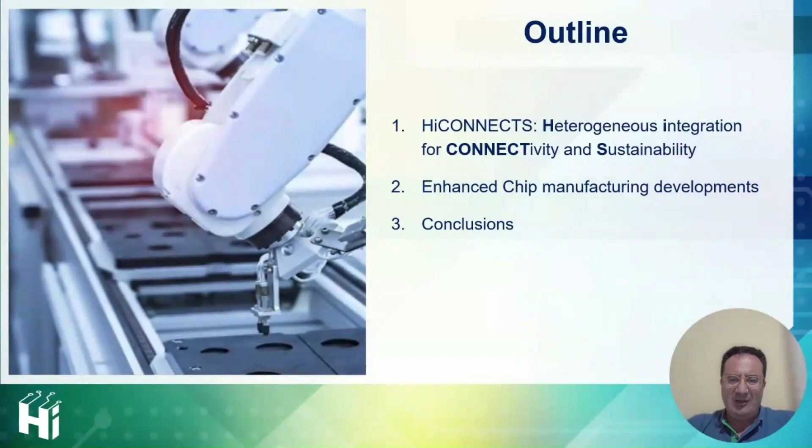Today, I have the pleasure to describe the improvement, the activity that we are developing in manufacturing in the framework of the project HiCONNECTS. And at the end of the presentation, some takeaways to remember what we discussed together. Regarding the project HiCONNECTS, consider that it is funded by Chips JU and is composed of 67 partners coming from 15 countries. The main objectives are developing heterogeneous integration for energy efficient and high performance wireless, wired, cloud and edge computing, as well as automotive radar, in order to improve transmission of Internet of Things data over IP networks, and sensing of objects to enable highly automated driving.

Consider that we also have other developments focused on RF technology, radar, IT data, infrastructure, but focus the attention on the heterogeneous integration objective. We talk about a system composed of different components, so it is easy to understand that the failure of only one component brings the failure of the system. For this reason, work on improving the quality in manufacturing has a result and an impact directly on the heterogeneous integration system.

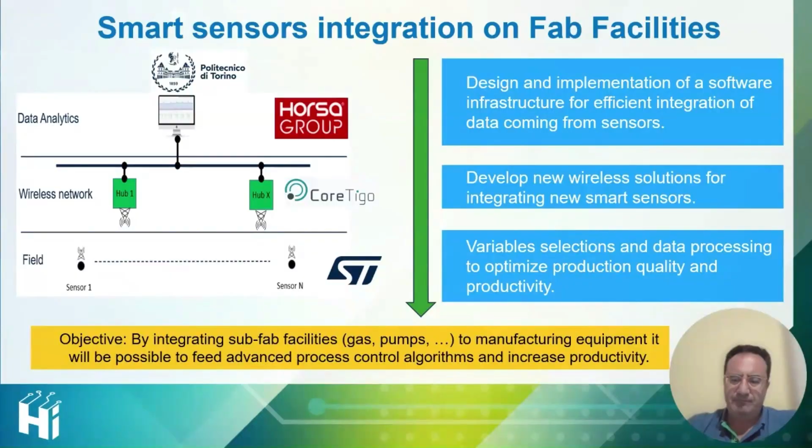Another important topic is represented by equipment performance optimization. In this case, the objective is to correlate electrical performance with inline process and metrology parameters in order to speed up the root cause identification and anticipate potential deviation in terms of final performance.

It is a complicated task because it's necessary to combine, in electrical wafer sort, all data, really big data, that are related to all wafers, for all dies present inside the wafer, and what we obtain following our process control plan in line when we perform metrology measurement to take the process under control. In this case, we analyze only a sample wafer for each lot and only some dies inside the wafer.

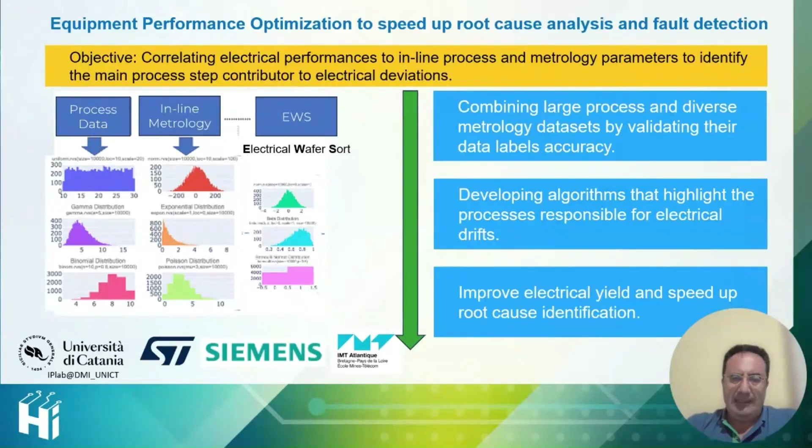So, in this case, we are working with the University of Catania, Siemens EDA, and IMT. And as shown before, it is really important to improve the metrology part, so to have new machines to perform measurement without scrap wafers. In this way, it's possible to perform inline measurement directly on production lots. For this reason, we are working tightly with some metrology partners. In this case, I talk regarding Semilab, Bruker, Nova, TNO, UPB, and also recently FBH.

The scope is always new materials and new approaches. So, for example, with Semilab, we are exploring a new method in order to obtain a characterization of the silicon carbide bulk using approaches that are standard in silicon. But obviously, we talk about a different material, and the situation is totally different. Also for this reason, it's really important.

When we talk regarding silicon carbide, an important topic is represented by the defectivity. So, with Bruker, we are analyzing the opportunity to use high-resolution X-ray imaging in order to replace a destructive analysis. And in a similar way, we are working with Nova, TNO, and UPB. These represent the future for next developments and a way to make more robust the algorithms that other partners are developing now.

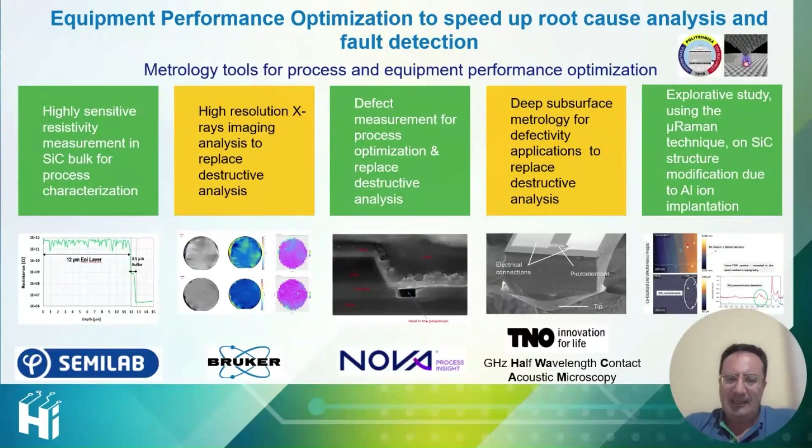In order to also take the process under control, our colleagues in Agrate focused attention on the dry etch process step. Consider that when we introduce a new product, typically we have different process flows, different materials, and the standard advanced process control, APC, sometimes is no longer capable of catching equipment drift. So in this case, they first added a new sensor, optical emission spectroscopy, and a new algorithm developed by Politecnico di Torino in collaboration with Horsa Group for the software solution.

Also in this case, we have to face an unbalanced dataset. That is the typical situation in the semiconductor environment, because we have a lot of wafers in the best condition and only a few that have worse performance. So from this point of view, it's not easy to find the right algorithm, but thanks to our partners, now we are in the condition to deploy this new approach directly in production and start to gain the benefit of this collaboration.

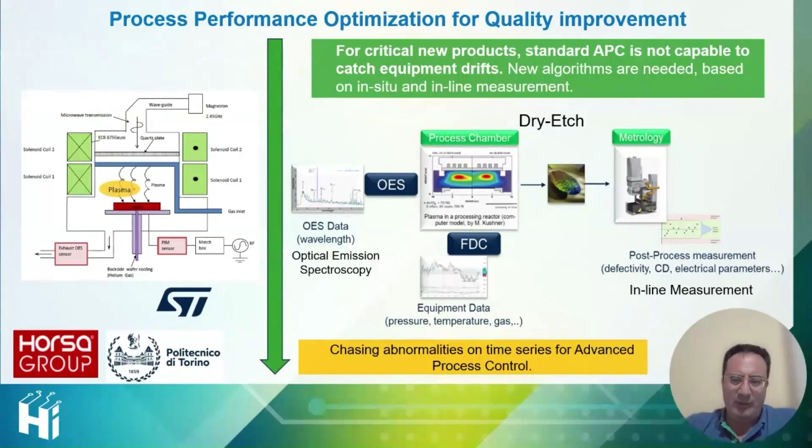The last step is to give our contribution. So you can see that partners of Siemens and IMT are some semiconductor manufacturing and also metrology partners, in order to develop a modular approach to cover all the line and include new information in an easy way when necessary. For example, we introduce a new machine, a new data silo, and thanks to the work developed by Siemens, it's possible to drastically reduce the time needed to include new data, new sources of information.

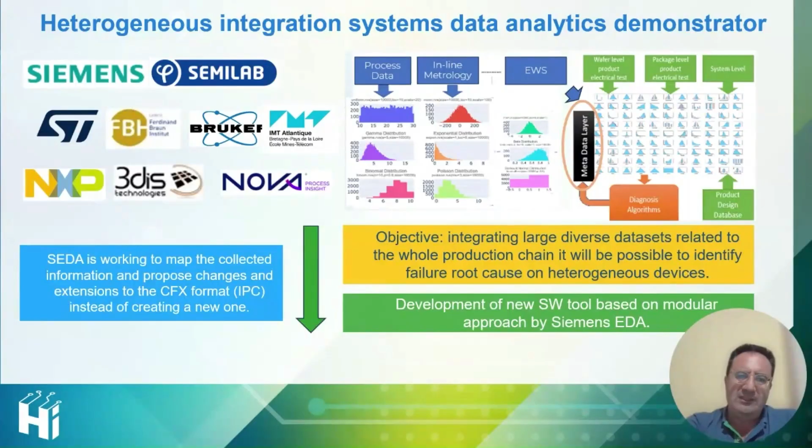To summarize what Siemens EDA and IMT are developing for us, the next slide can help me describe the topic. You can see a representation of the front end. We have the front end of line, the back end, and the electrical wafer sort. When we talk regarding the front end, we have a statistical approach to decide which wafers to measure for a specific process step. The green wafers give you an idea that with different rules in different process steps, we select a certain number of wafers and a certain number of sites in which to perform the measurement.

Instead, at EWS measurement, we have all the information, all wafers measured, all devices. So this is the first difficulty that they had to face, but it was really successful because they found a way to pay attention to correlations that we can confirm as physical correlations between electrical data and inline measurements. The first KPI was achieved.

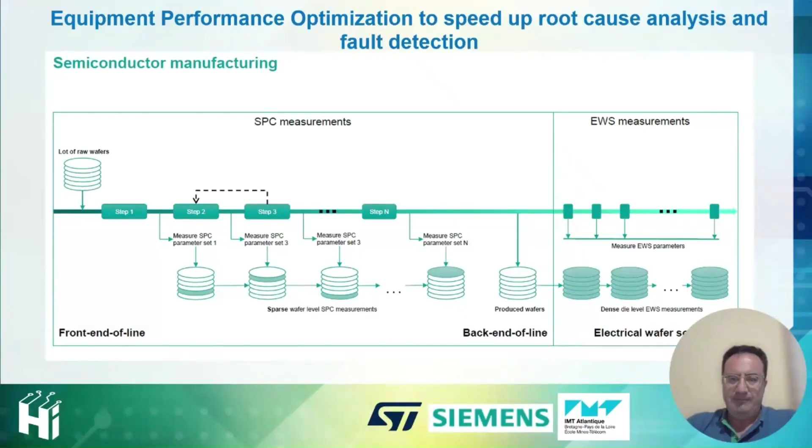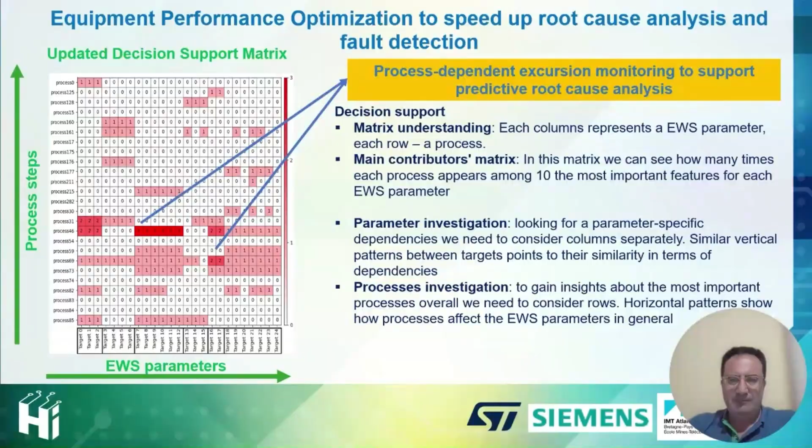So we are at the end of this little journey to describe what we are doing thanks to Chips JU in the project HiCONNECTS. Consider that the focus is on heterogeneous integration, but the contribution of semiconductor manufacturing is really important. In conclusion, all the activity that we perform to improve the quality, the yield, the performance of devices in semiconductor manufacturing has a great impact to enhance the process of heterogeneous integration of power devices. This is the key message from my side today.

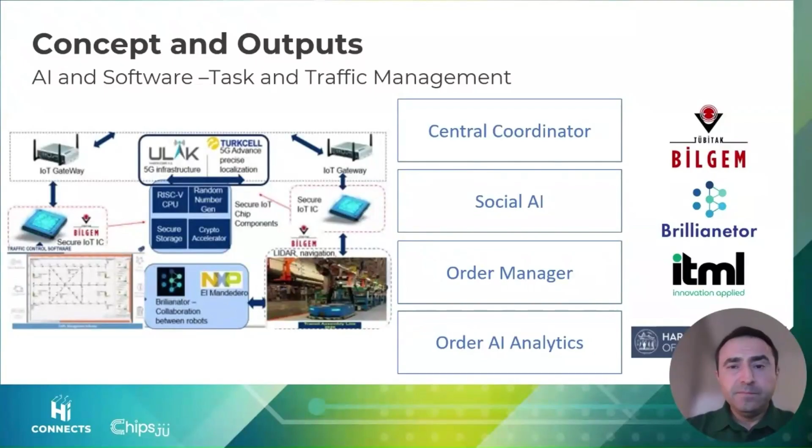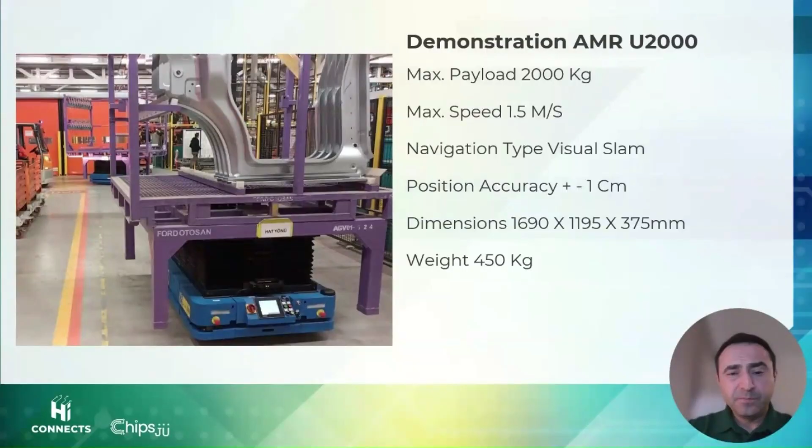The technical specifications of the demonstration AMR U2000 are as follows. Its maximum payload is 2,000 kilograms and maximum speed is 1.5 meters per second. Visual SLAM navigation is used, with plus minus 1 centimeter position accuracy. When it is loaded in the demonstration, its height is almost 3 meters and its weight is 450 kilograms. In the picture, you are seeing the demonstration area, with the AMR loaded with the parts, and the use case area is located in the Ford Otosan

welding area. The Ford Otosan Kocaeli plant is the only Ford plant in the World Economic Forum's global lighthouse network, recognized for its exemplary technological integration. The designated use case area is the body side right line within the welding area. This line necessitates the coordination of 14 distinct parts, facilitated by 3 loading stations and 10 unloading stations. You can see the layout of the area. It is covering a wide area.

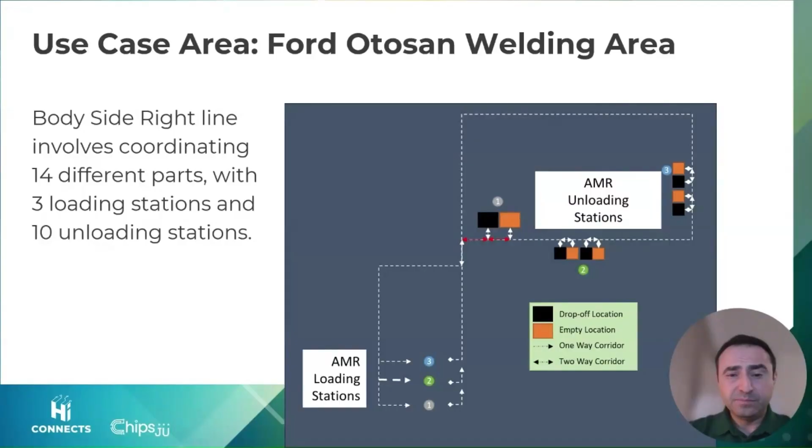The task and traffic management system encompasses five primary components. The central coordinator software oversees the monitoring system, while the order manager is responsible for resource management. Collaborative social AI manages incoming tasks and schedules. The peripheral system interfaces with automated gates and stations. Lastly, the AMRs are governed by the comprehensive task and traffic management system.

Additionally, there are the agent applications integrated within the AMR's robotic software, including the TMS agent, collaborative social AI agent, and peripheral agent. The communication relies on the MQTT protocol. It is a lightweight publish-subscribe messaging protocol, with the VDA 5050 interface.

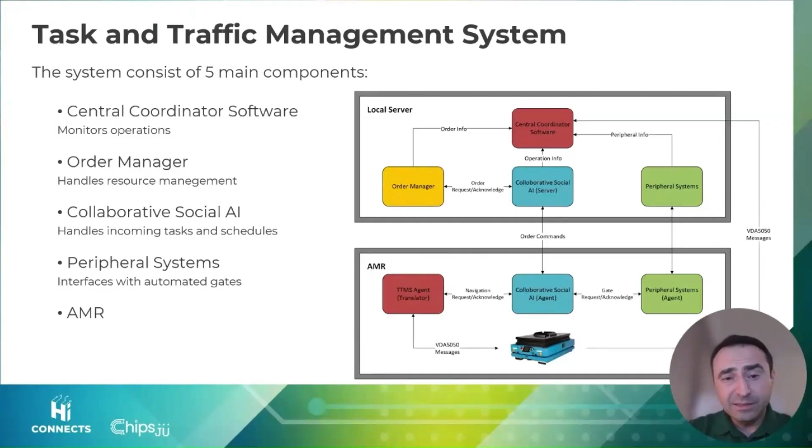VDA 5050 was developed by the German Association of the Automotive Industry and the German Engineering Federation. It is a standardized communication interface designed to ensure interoperability between various automated guided vehicles, AGVs, and mobile robots from different manufacturers and the central master control system. Robotics supports VDA 5050, and in this project, we aim to provide outputs that are broadly compatible with other AMRs as well.

The task and traffic management system incorporates heterogeneous communication and operations between edge and the central system. Local server communication and cloud-based modules interact seamlessly, providing input and output for their respective applications. Communication with AMRs is facilitated via an MQTT broker. Within AMRs, internal communication is enabled through ROS topics, ensuring real-time coordination. The AMR operation protocol adheres to VDA 5050 standards.

Peripheral connectivity is achieved by integrating production line devices such as gates and PLCs through IO-Link wireless bridges, ensuring flexible and scalable connections. The central coordinator software offers a user interface accessible via both mobile and desktop devices.

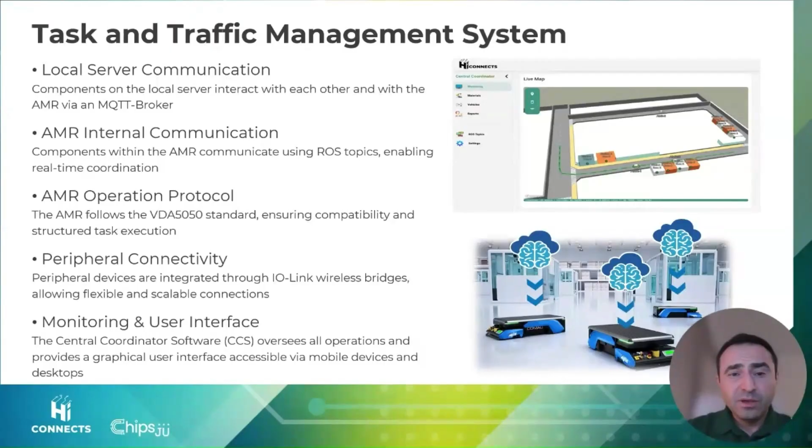You can see the simulation of the demonstration area. Brillianetor's social AI effectively prevents deadlock between two AMRs in a one-way narrow path application. The AMRs communicate and decide on the optimal course of action before entering the narrow path. In the unloading area, you can see one AMR leaving the path to allow an AMR with a full order to pass.

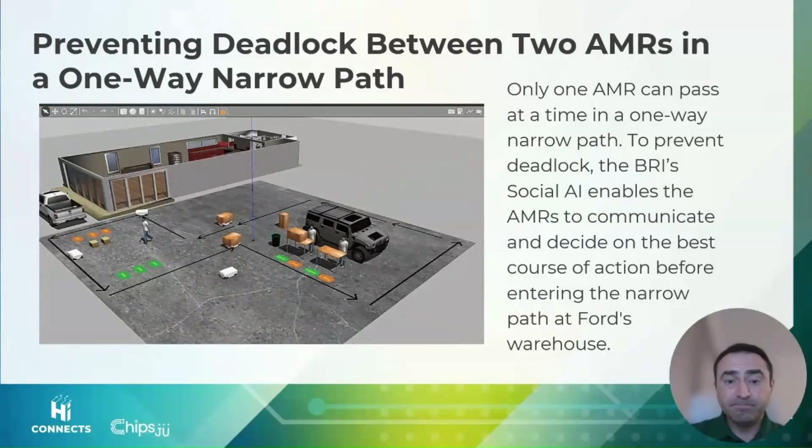In conclusion, the management system for secure, connected, autonomous mobile robots incorporates high dynamic range LiDAR sensors and AI-supported task and traffic management at the edge. And in the second chapter, I will introduce the autonomous mobile robots developed by BluePath Robotics.

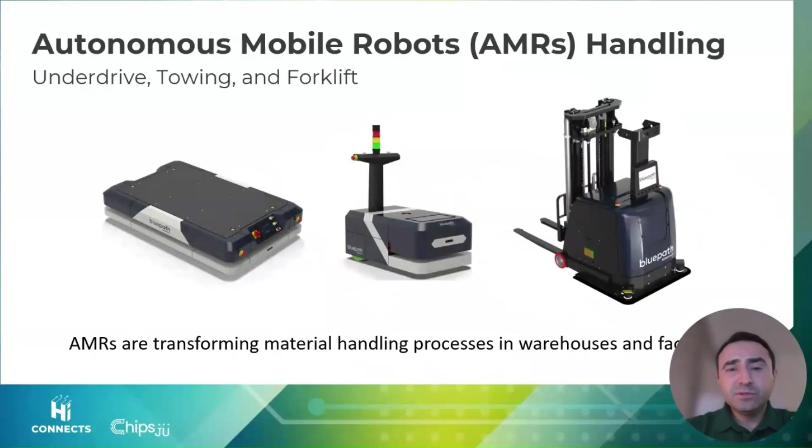There are three primary product families: underdrive, towing, and forklift. Underdrive type AMRs are designed to transport containers and racks using lifts. These also have functions as process AMRs, providing a versatile mobile platform that facilitates the creation of dynamic and flexible production lines. It is next generation production lines.

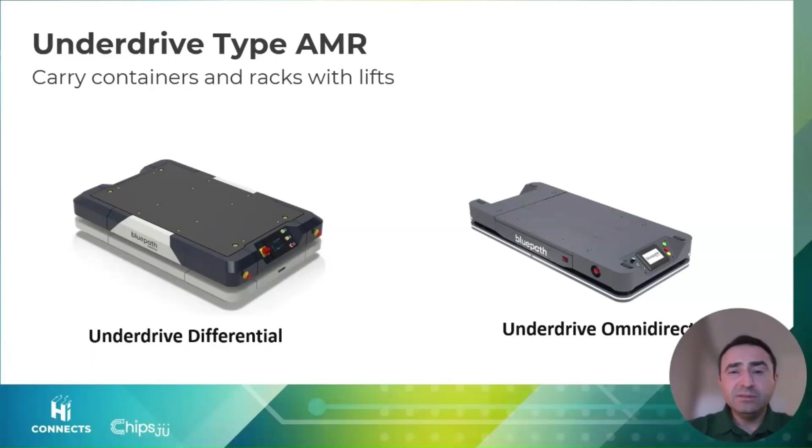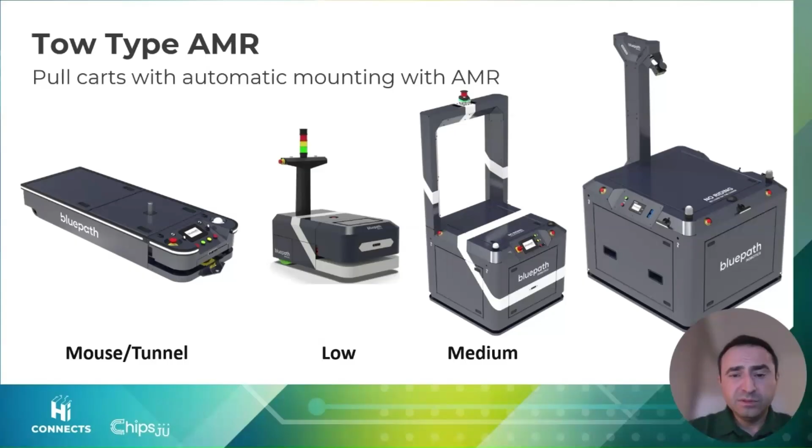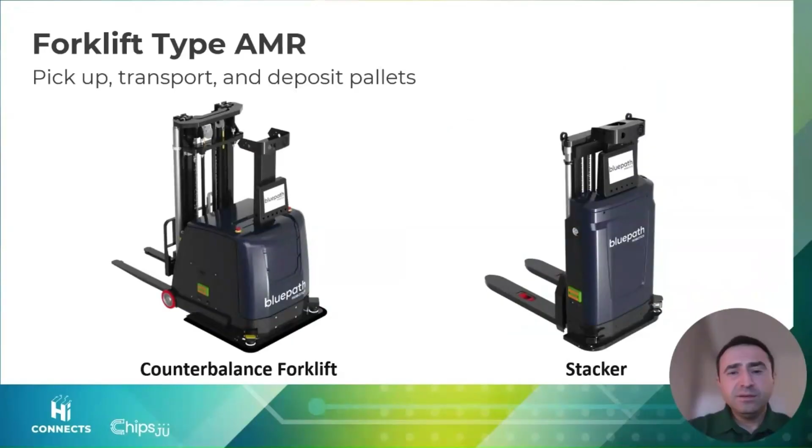The last one is forklift type AMRs, designed to pick up, transport, and deposit pallets, and they come in two varieties, counterbalance and stacker type. These are the robots, and BluePath Robotics also provides centralized software and services to innovate, automate, and integrate AMRs into production lines. The peripheral manager facilitates communication with the production floor, and the material flow manager designs and integrates production plans with the AMRs.

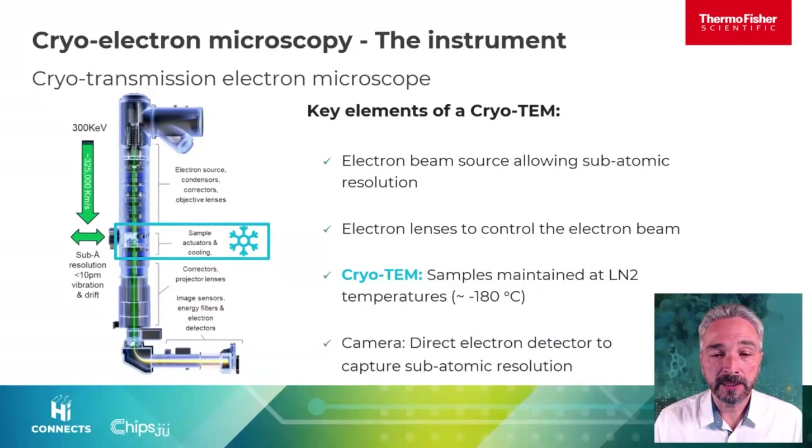Cryo-electron microscopy has gained a crucial role in structural biology in the last decade, basically because it's capable to achieve high resolution. The most popular technique is single particle analysis. And why single particle? Because it is applied to isolated proteins or groups of proteins that form stable complexes. The workflow is relatively simple, laborious but simple.

You extract and purify your target. You apply one drop of the solution to a cryo-EM grid, a metallic grid covered by a plastic support. You need to freeze them very quickly to produce vitrified ice. And then you can transfer this sample to the cryo-transmission electron microscope. And not all the grids are suitable for high resolution data acquisition. You need to determine if the sample is suitable, and here we are talking about screening your sample. This is a time-consuming step, and our efforts in improving the workflow have to do with this step of screening.

Once you know that your sample is good enough, then you take images for hours or days to acquire many images. In each of these images, you have many copies of your protein. And this is because the cryo-EM images are very noisy, and you need to average many particles in different orientations to be able to increase the signal-to-noise ratio.

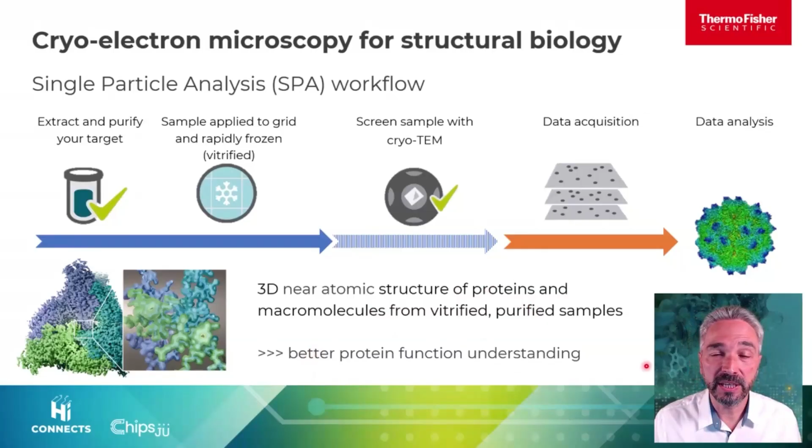But as if it were not enough, this is also very valuable in practical application with strong impact in society, because our partners in the pharma industry are telling us that structure-based drug design has two times the rate of clinical success at 50% of the preclinical time, and also a reduction of cost compared to not having a structure. Okay. So cryo-EM is accelerating drug discovery with rational design. Why is that? Because when you have the high resolution structure of your target molecules, you can better design the drugs and the carriers.

You have information exactly of the atoms surrounding your drug. So to have this high resolution information helps pharma to design more effective drugs and vaccines by knowing exactly how they interact with their targets.

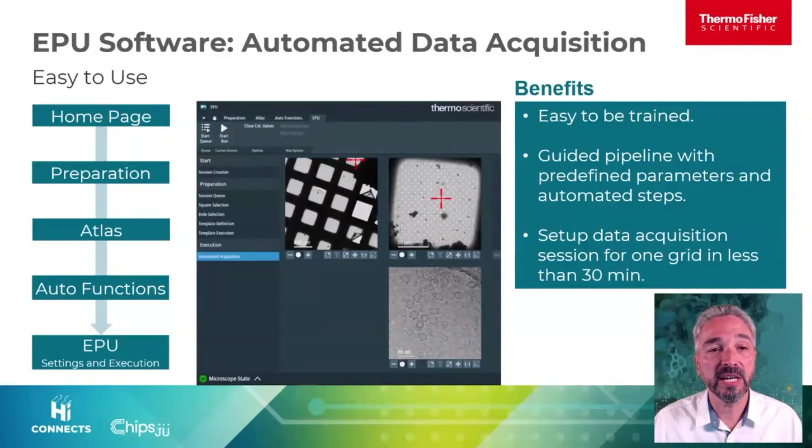So the setup of an EPU session consists in selecting the best grid squares and the best foil holes that contain ice thin enough to give you the best contrast of particles at high magnification. This is normally a procedure that requires some expertise and takes some time, and that is the reason why we have been working on the automation of these steps. And now we are talking about a Smart EPU that additionally has AI algorithms to take over these activities that normally a trained user would do.

So we have developed trained neural networks for developing the tools for automatic selection of grid squares, the identification of the foil holes, and the selection of foil holes based on ice thickness. The other part of the workflow in EPU, that is taking images at low magnification and acquiring the high magnification images, are already automated since a long time.

But these were the manual steps that now do not require any pre-knowledge from the users. So we are getting high quality because we are focused on the best places to take images, increase efficiency, less time to set up a session because it will run automatically, and it promotes easy adoption. You don't need expertise for that.

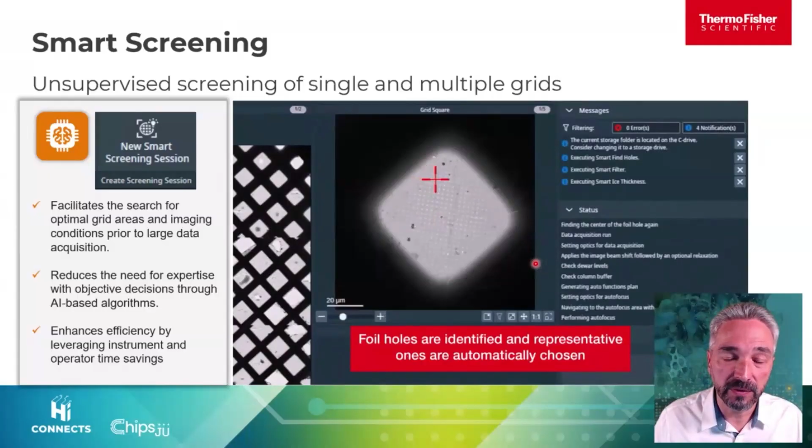And then with this setup, you can start your session that will run independently without user supervision. The sequence starts with the automatic acquisition of several low magnification images to cover the whole grid. Then the program identifies the best squares, goes there, takes images of these squares, and classifies and identifies the foil holes to take high magnification images in representative holes to get an idea of the variability of ice quality in your grids.

So the execution proceeds completely unattended, and the result will be a set of high resolution images in which you can see if your protein is concentrated enough and if it's not falling apart, and identify which are the conditions of ice that are the best for your protein. So this gives you an idea of how we are accelerating the setup of a session via software.

And now I want to talk about the data management challenges. This automated image acquisition imposes high demand of data management. The state of the art at the moment is, with our most recent model of cryo-electron microscope and the best camera, you can get up to 1,400 images per hour. This translates into about 340 gigabytes per hour. And you can imagine that a microscope server that we provide with 70 terabytes of storage will be full in only a few days.

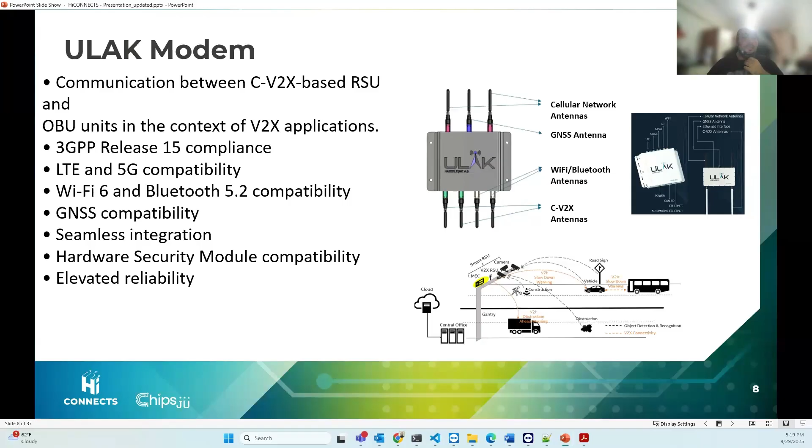In the following slide, I will talk about the ULAK V2X modem. This modem connects vehicles and roadside units, and it supports 5G, LTE, Wi-Fi, and GNSS, and works on embedded Linux. For the integration phase, the modem has two antennas for V2X, GNSS, and Wi-Fi, Bluetooth, and also an Ethernet port. It also supports GPS, GLONASS, BeiDou, and Galileo with high accuracy, 1.5 meter accuracy. This is the hardware side of our system.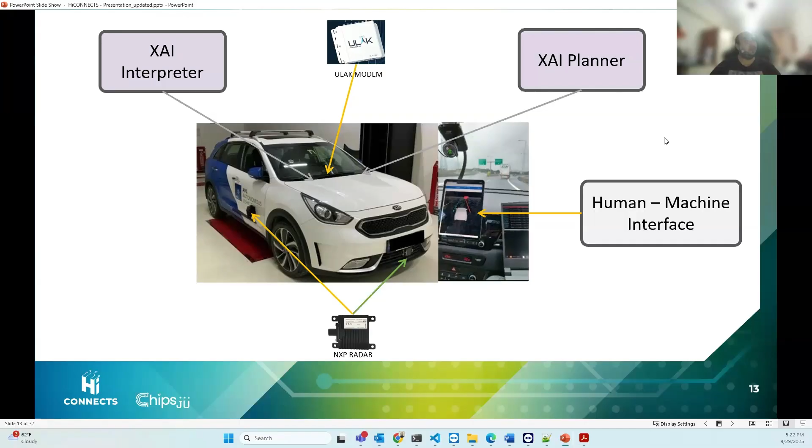Here is the big picture of our HiCONNECTS project. We take inputs from the NXP radar and V2X messages from the ULAK modem, and our XAI interpreter and XAI planner algorithms take this input and create our results. Then our HMI shows these explanations online, so people can see and trust the system and review a decision later. In the following slides, I will briefly mention the XAI interpreter and XAI planner algorithms. Now I will go with the XAI interpreter part.

The initial question is why this XAI interpreter is needed. Today's deep networks can feel like black boxes, and in autonomous driving that's not okay, because we need to see what drove each choice. For that, we use two complementary methods for the interpreter. The first one is learned attention weights, which provide visual evidence, and the second one is object-level attention, which captures agent influence and gives the signal context. This combined explanation keeps the planner focused and makes the HMI outputs easy to trust.

For the XAI interpreter, we are also working with Vilnius, collaborating with their social AI algorithm, and we fuse these two algorithms to make attention more accurate before giving the result to the XAI planner part.

So we combine these learned attention weights and object-level attention with the validator XAI to create more stable and transformative explanations. And this is actually a collaboration with the validator for the interpreter part. And as I said before in the two slides, the XAI interpreter employs two complementary methods. One of them is object-level attention. The other one is learned attention weights.

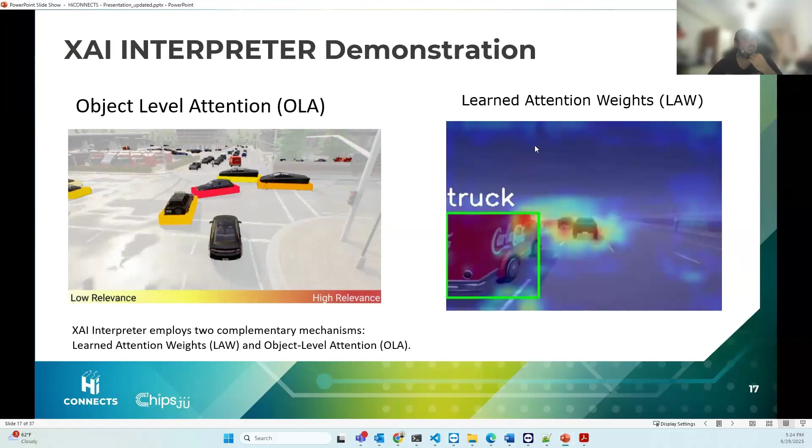So the object-level attention actually ranks cars in our lane and next lane by impact. And in this algorithm, it uses the speed, distance, and orientation of the other vehicles. And so each object actually gets a score from 0 to 1. You can see on the right upper side and also the right below side. Each of the objects gets 1 to 0. 1 is highly influential, 0 means negligible.

And these scores actually inform the explanation and also make clearer decisions for our algorithms. And it shows the most critical object near the autonomous vehicle. And this object-level attention demo shows us the result of that. And for the other structure, learned attention weights, we use Grad-CAM in our algorithms, and it gives an attention map which shows where the model focuses for each prediction.

And for the learned attention weights, we can see the results of the learned attention weight algorithms in this slide. When we look at this slide, we can say that practically ResNet algorithms produce the most reliable and explainable attention maps. So when accuracy and interpretability matter, ResNet is better than MobileNet, but MobileNet is also real-time friendly. If you have weaker hardware, you might use MobileNet, but when accuracy and interpretability matter, you can use the ResNet version.

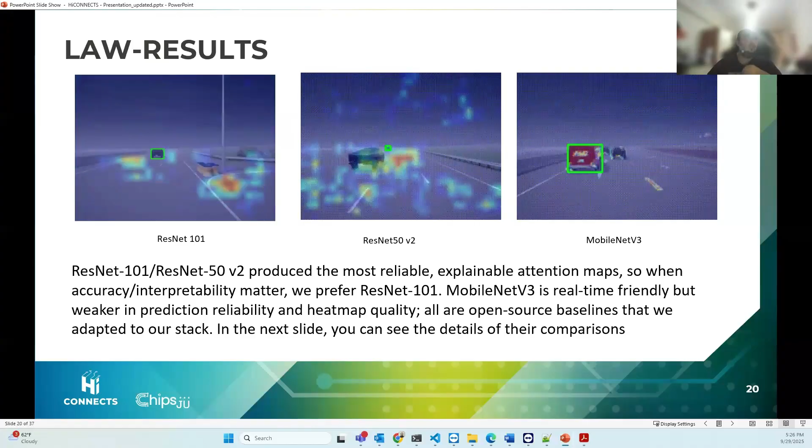So in the next slides, I will present the section related to the XAI planner part. And I will begin with why this XAI planner is needed, because as I said in the XAI interpreter part, the planning decisions must also be transparent, and we need to create more transparent and more reliable results. So we create a hierarchical reinforcement learning setup. A high-level agent selects behaviors and low-level controllers execute them. We do not directly control the low-level part. We only train the high-level agents, and high-level agents select the behaviors, then low-level controllers execute them.

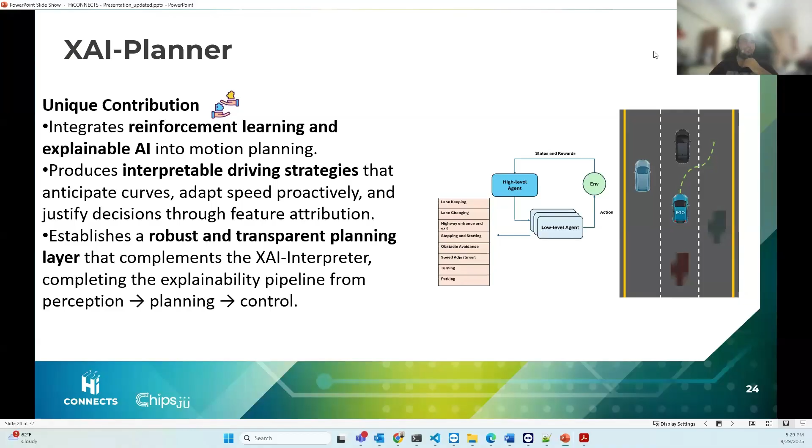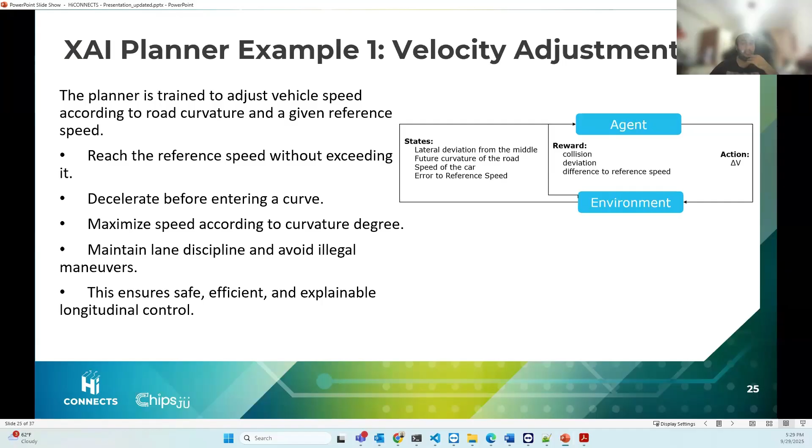So in the XAI planner part, we have two examples here. One of them is velocity adjustment. The other is a lane change example. The first one, velocity adjustment: this velocity agent tracks the reference speed without overshooting, decelerates before entering curves, and maximizes speed safely according to curvature. And for that, as I said before, we use the CARLA environment. We created a CARLA demonstration here.

The high-level agent picks the driving mode, and the low-level agents anticipate the curvature and reduce speed. For example, in that demo, the reference speed is 79.2 kilometers per hour, and our autonomous vehicle speed is set to 77 kilometers per hour. If we increase the reference speed within 1 or 2 seconds, the agent learns that and increases the autonomous vehicle speed as well.

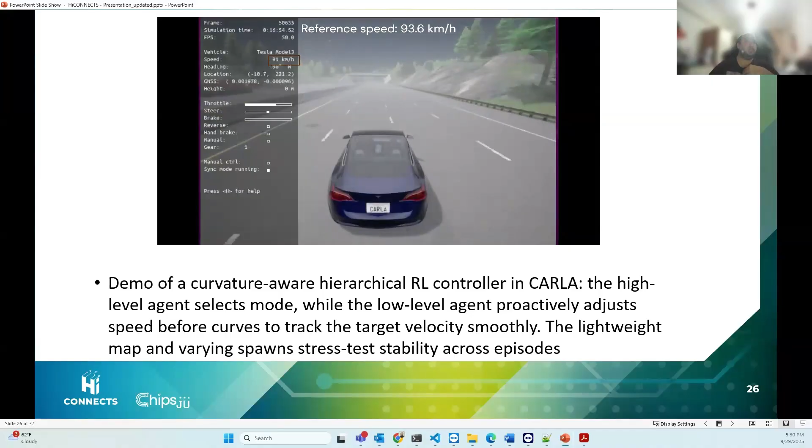We train this agent in the Carla environment for different kinds of maps, and we are currently developing our algorithm in that way. As I said, we have two examples. The other part is lane change. For the lateral maneuvers, policies are trained on curves, straights, and mixed traffic. The planner anticipates upcoming curvature, respects the reference speed, and performs safe, explainable lane changes.

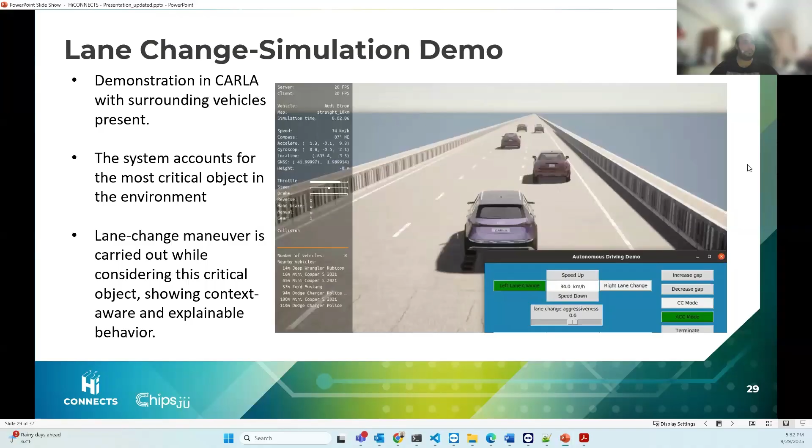For the lane change, we also have a Carla simulation demo here. We create more scenarios for the lane changing algorithm in the Carla environment, because there we add more traffic and more extreme scenarios. We use the lane change simulation algorithm here. We will continue developing this algorithm, and in the next couple of months we will try to finish it. Our developments are continuing right now. These are the XAI planner parts.

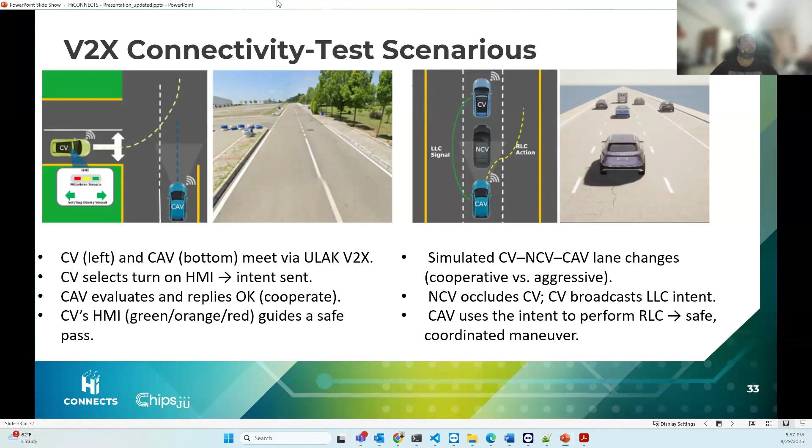The second scenario is more complex. A non-connected vehicle partially blocks the connected autonomous vehicle's perception. The connected vehicle broadcasts, for example, a left lane change intent, and the connected autonomous vehicle uses that intent to plan the right lane change, creating a safe coordinated maneuver. This shows how intent sharing reduces ambiguity and improves safety for lane changing and other situations. This is near the end of the presentation, and I will also share the general results and future plans.

And for the next phase, we will complete real vehicle tests with our radar and our modem, publish the KPI benchmarks versus our targets, get these KPI results and see the consistency between evidence and influence. And for V2X, we will extend the real-time demo for the intersection for connected vehicles and connected autonomous vehicles, and we will standardize this safety and testing environment.